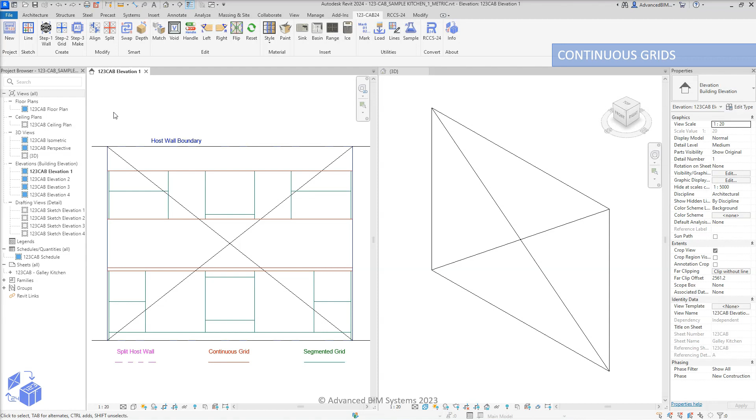When adding curtain grids in Revit, it's best practice to follow the most efficient order. Always add the continuous, all segments grids first, followed by one-segment grids.

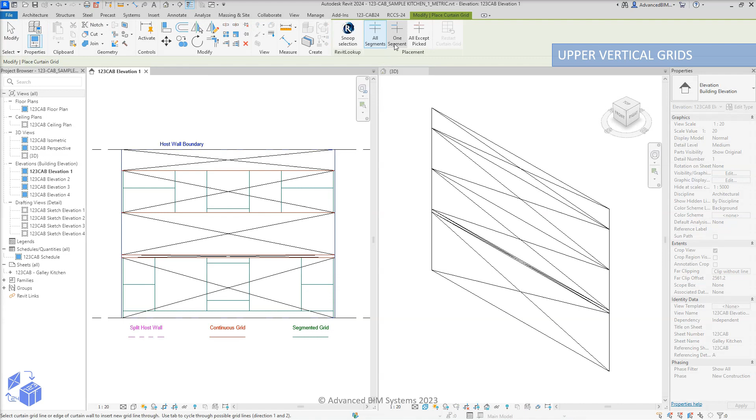This kitchen demonstration illustrates one of the more efficient grid orders that can be applied to this particular design. Let's add the upper vertical, one-segment grids first, followed by the upper horizontal grids.

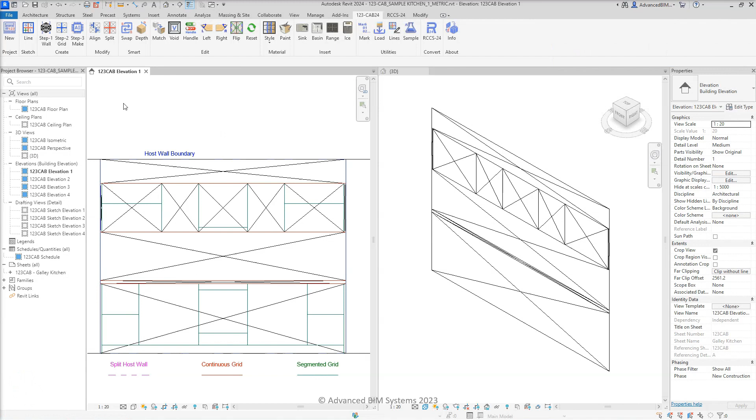As you'll soon see, we only need to add two upper horizontal grids to this elevation. This is because all grids are continuous from end to end, so we can simply add the final grid segment as part of the first horizontal grid.

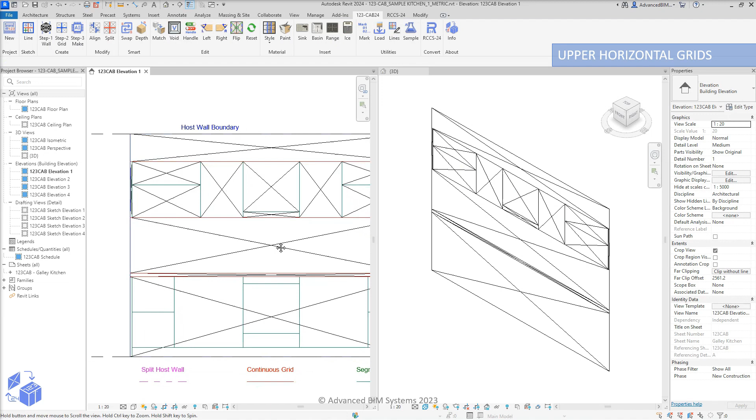We can now move to the lower part of the design and select the existing upper infill panel grids. This will allow us access to the Add Remove Segments function to add the lower infill panel segments.

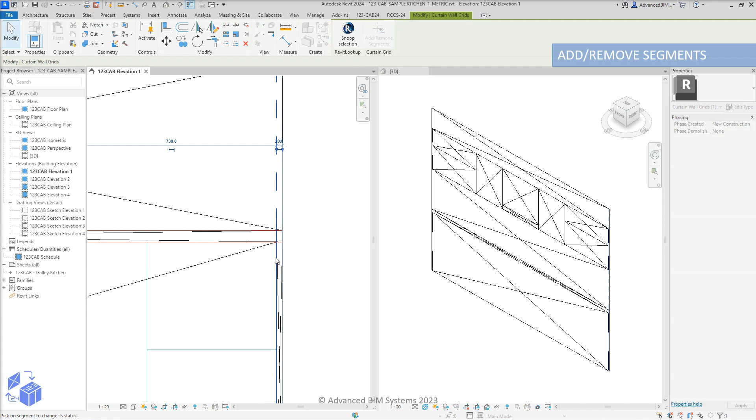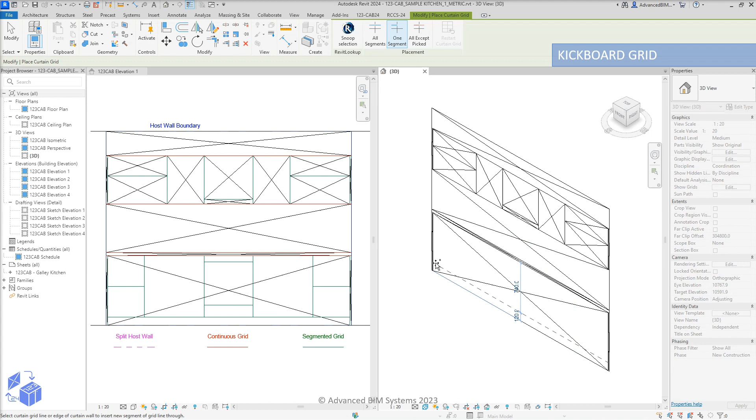Before adding the lower, vertical grids, we need to first add the kickboard grid, as well as check the kickboard grid preview to ensure the whole segment is added correctly. Once the correct placement side is established, the grid can be successfully added.

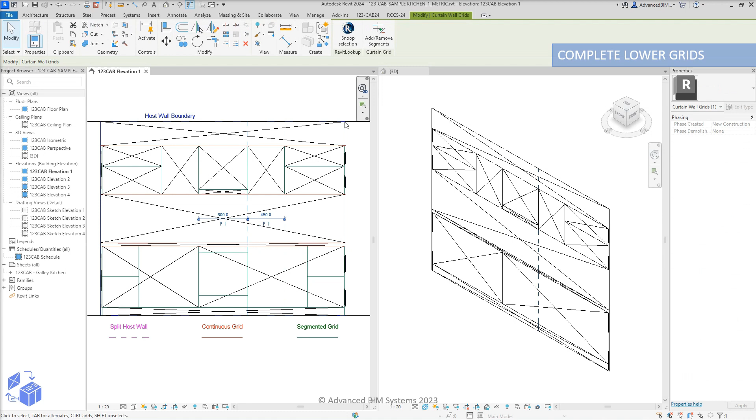Now that the kickboard grid is in place, we can start to add the remaining lower segments, using the Add Remove Segments tool, as well as creating new vertical and horizontal grids and segments where required.

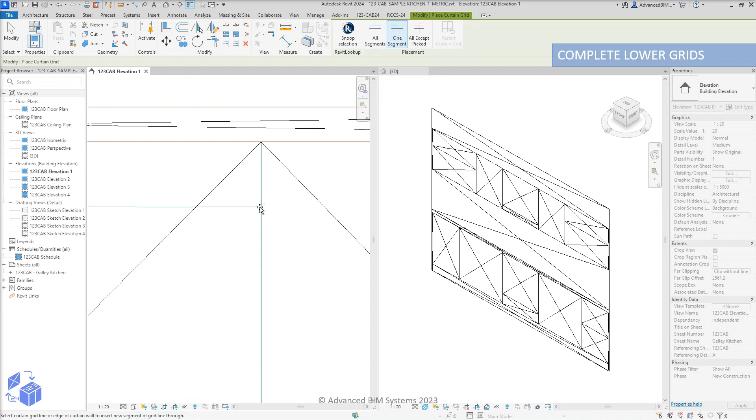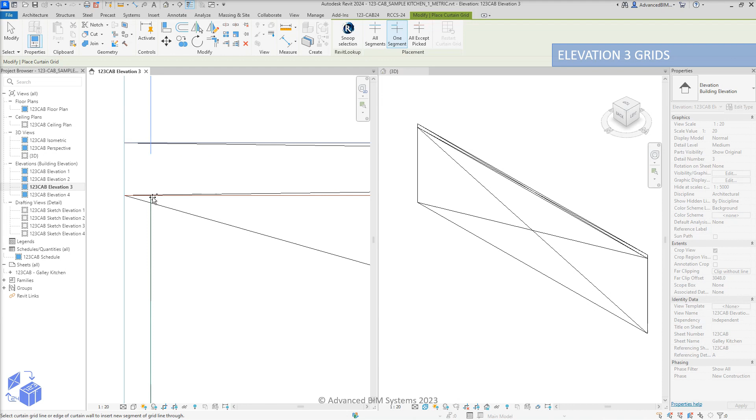Let's now add grids to elevation 3 in this design, using the same principles that were employed for elevation 1. Simply add grids from the outer cells first, followed by the inner cells. Aim for efficiency, with the least number of clicks as possible.

Remember that any grids that don't snap to their respective grid snap line can be aligned later using the Align tool.

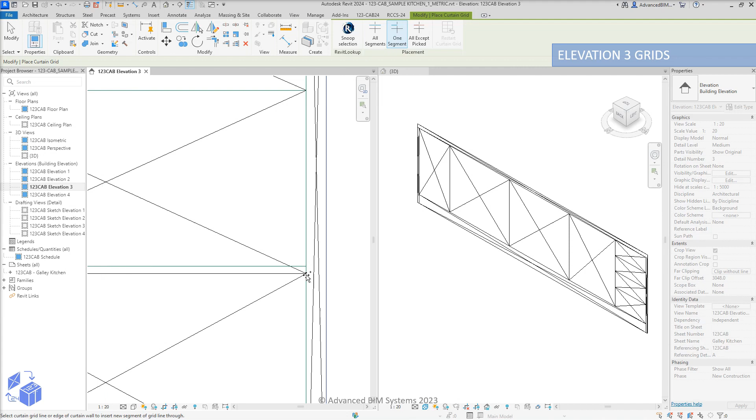As with any 1-2-3 cabinetry design, once all the grids are in place, simply activate a 3D view and press the Make button to create your 3D model.